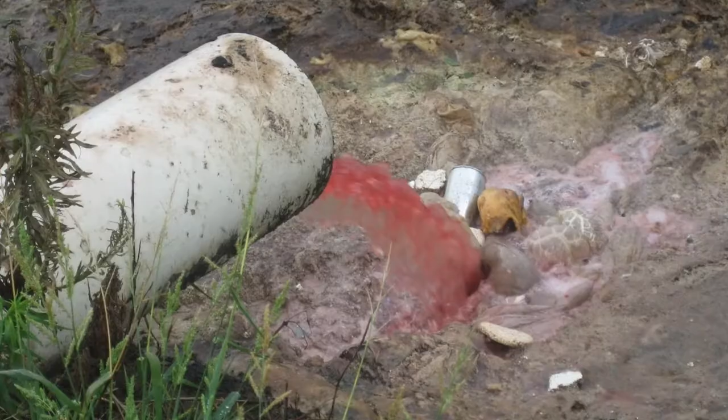Water is important to our economy and enjoyment, as well as to the environment. However, without clean water, each of these areas suffers. Without clean water, our survival would be in jeopardy. Clean water is required for drinking, bathing, and sanitary reclamation.

Clean water makes recreation possible. Clean water is necessary for safe farming and food production. Clean water is utilized for heating, cooling, and a myriad of other applications.

Water occurs naturally as part of the global ecology. It can be found in the sky, on the surface, and in the ground. Water can be a vapor, a liquid, or solid form. Water travels from one form to another, and along the way we can use, recycle, and return it.

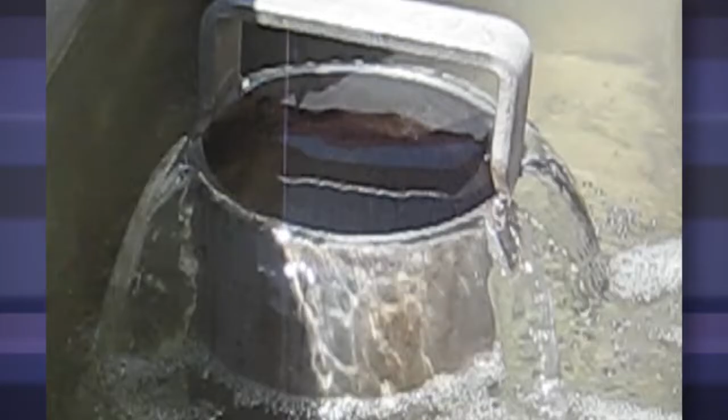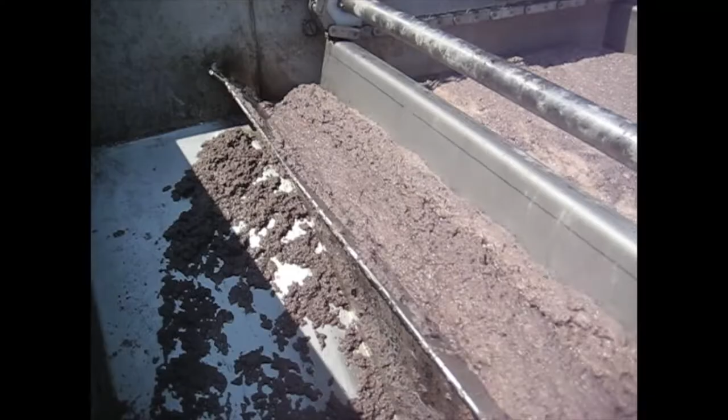Process Engineered Water Equipment is in the business of making water clean, usable, and available again. To this end, PEWE produces systems for both the many industrial and municipal markets. Our quality equipment speeds water reuse through the liquid-solid separation process by removing impurities efficiently. And by helping the process, PEWE is helping the world.

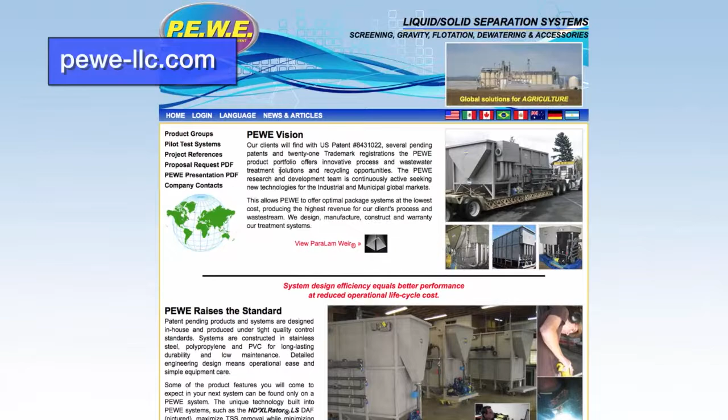Clients seeking water solutions find Process Engineered Water Equipment through our representative network, engineering firms, and marketing efforts. PEWE outreach efforts also include professional video presentations, scientific conferences, and published papers. Notable PEWE article links can be found on our website, as well as by internet search for PEWE presentations.

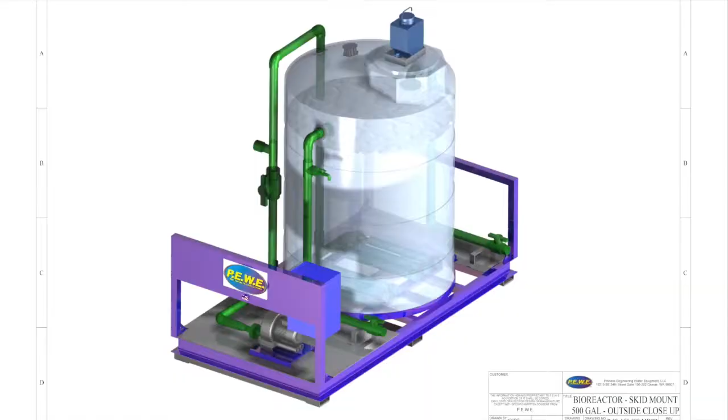PEWE begins with thoughtful design. Our engineers tackle a problem from multiple angles. When a system is developed, engineering draws it via CAD. Laboratory tests it, and then first-generation field analysis is performed. Once manufacturing improvements are final, the new system is ready to be introduced.

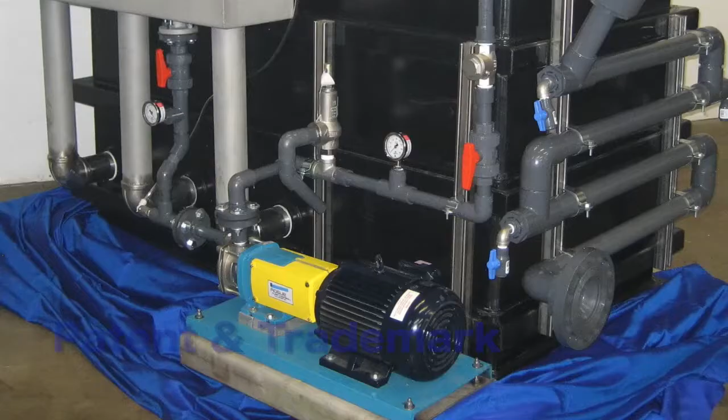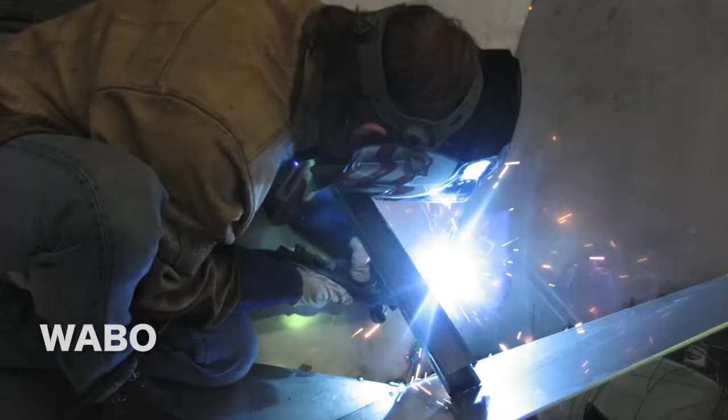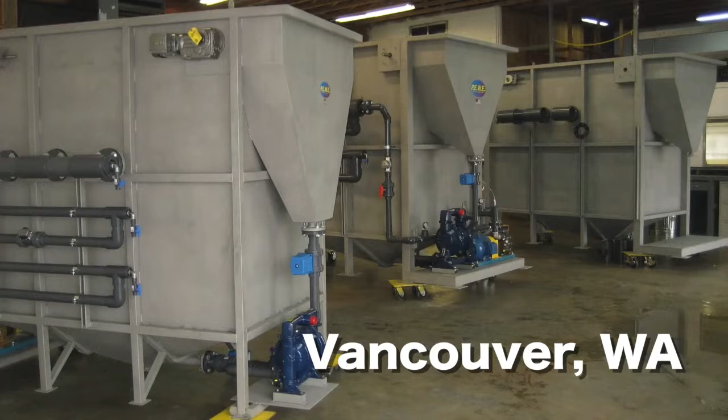PEWE has obtained patent and trademark registrations for our unique design solutions and continues to develop innovative solutions to solve pressing water issues. We manufacture our equipment in-house. This assures our clients of smooth production, craftsmanship, tight quality control, and prompt delivery. The engineering and fabrication facilities are located in Vancouver, Washington, on the west coast of the USA. From this plant, PEWE ships systems globally.

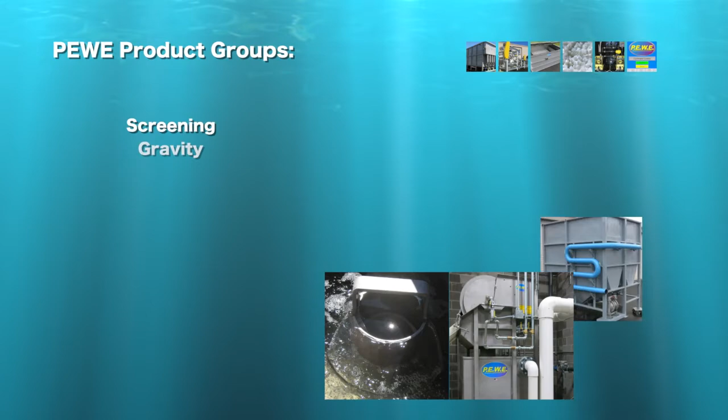PEWE product groups include liquid-solid separation equipment for screening, clarification via gravity and flotation, solids dewatering, biological reduction, and chemical accessories. Singularly or combined, PEWE control systems allow for economical and operational ease.

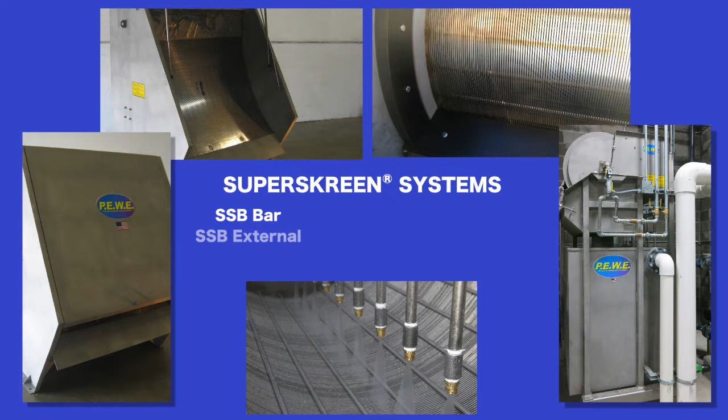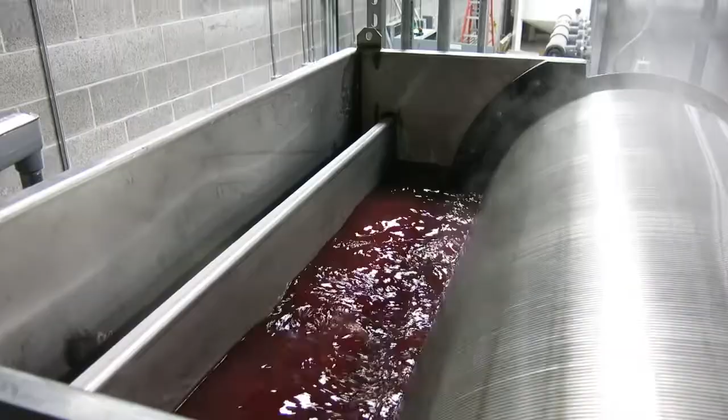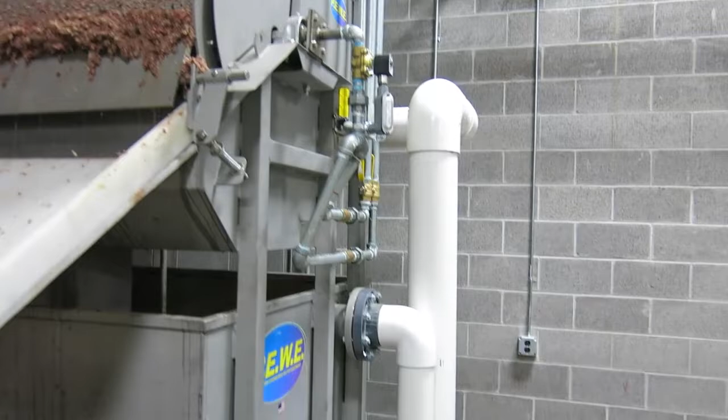PEWE offers a complete screening lineup with the SuperSkreen. Whatever the application is, one of our bar, externally fed, internally fed, parabolic side hill, channel, or thickener models is the answer. SuperSkreens are typically placed at the headworks of a wastewater treatment plant. They are used to remove large objects such as rags, plastic bottles, wood, food solids, and other debris from the waste stream before entering the treatment plant. SuperSkreens cover wide flow variances for both normal and stormwater conditions.

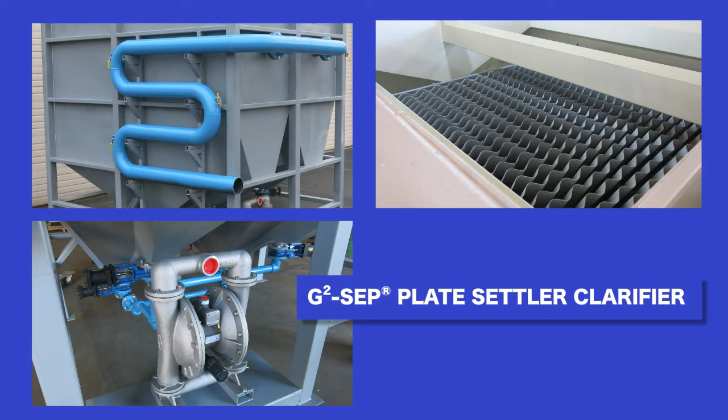Each PEWE G2-SEP plate settler maximizes settleable solids removal while minimizing chemistry usage. The chassis and vessel are constructed of AISI 304 stainless steel. With the true counterflow plate pack, the G2-SEP offers the smallest footprint available.

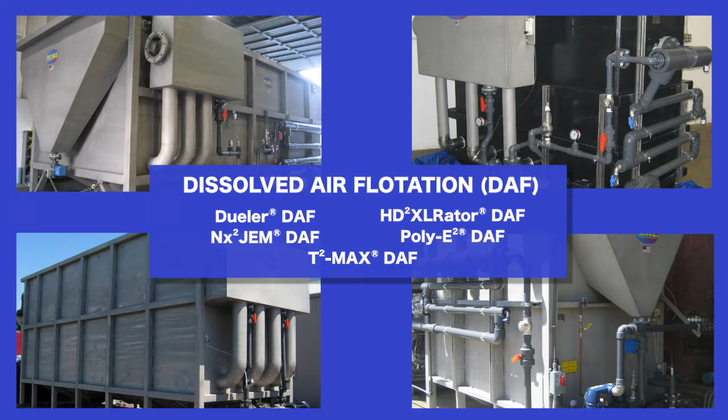The PEWE Premier line of dissolved air flotation, or DAF, systems cover the full range of solids removal possibilities. Flotation systems are available for very high solid sludge thickening, mixed settleable solids, as well as the more typical suspended solids encountered. All PEWE DAF systems feature integrated pipe flocculators, Roth pump regenerative turbine aeration, solids disposal pump, and safety recessed direct drive skimmer.

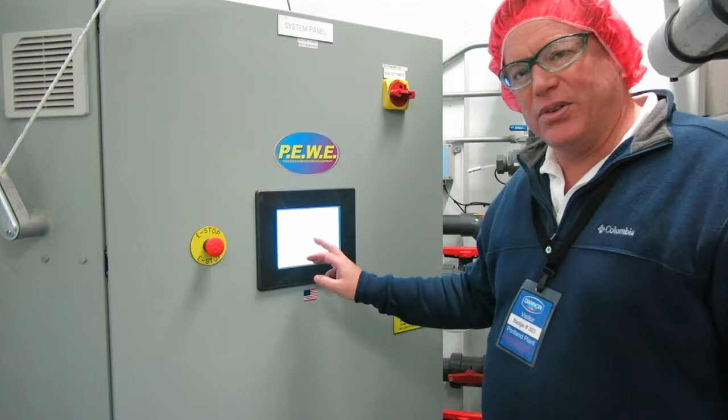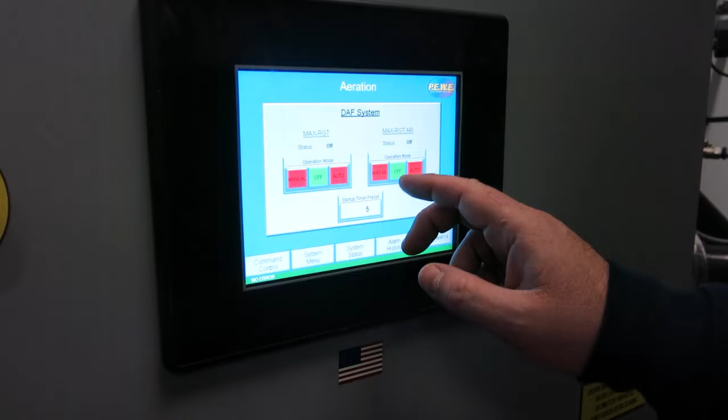Hi, good afternoon. This is Stuart Ward, and I'm going to be demonstrating how to turn the aeration system on this DAF system from PEWE. So the first thing we want to do is make sure the system is enabled. We're going to switch over to the system menu, click on the aeration, and we have manual and auto settings. For this demonstration I'm just going to simply hit manual.

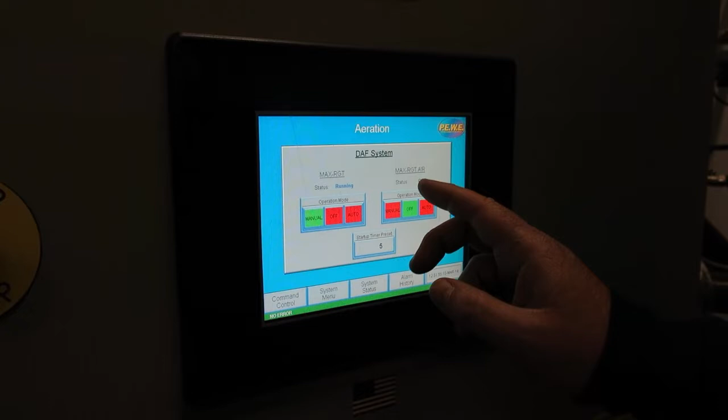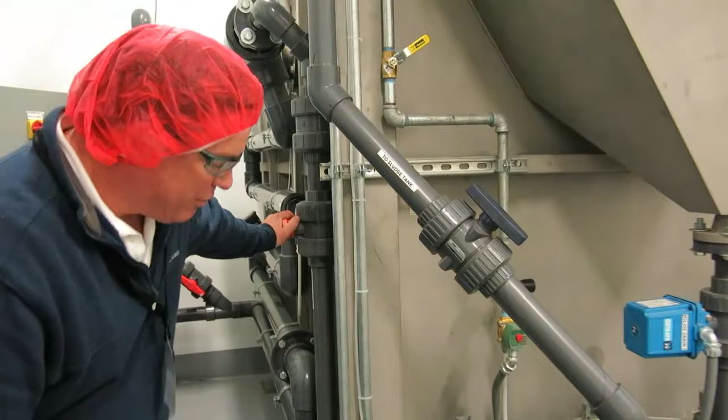So in this case we're going to turn on the MAX-RGT pump. It has a 5-second delay, which is adjustable by the operator. You hear the pump come on. Now we're going to turn on the air system. That is on and running. And we're going to come over here and adjust our throttle valve until we have 80 psi on the discharge.

Then we're going to make sure that we're sucking in just a little bit of a vacuum on the vacuum gauge, and we do that by setting our feed valve coming from the clear well into the head of the pump. And we can adjust the amount of air going into the system through the rotameter. Right now we have 43 cubic feet an hour going into the system.

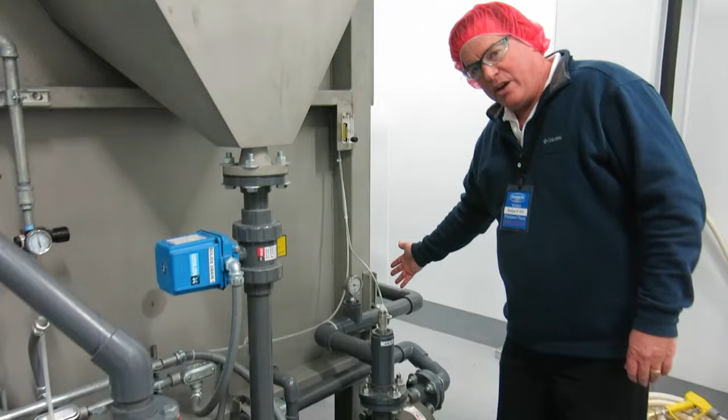So between controlling the air and water going into the pump, and maintaining a discharge pressure through this throttle valve, we can then inject aerated water into the system. And every time the system comes on, the DAF will get a 20 to 30 micron bubble, creating a great mat for floating our solids. Thank you very much.

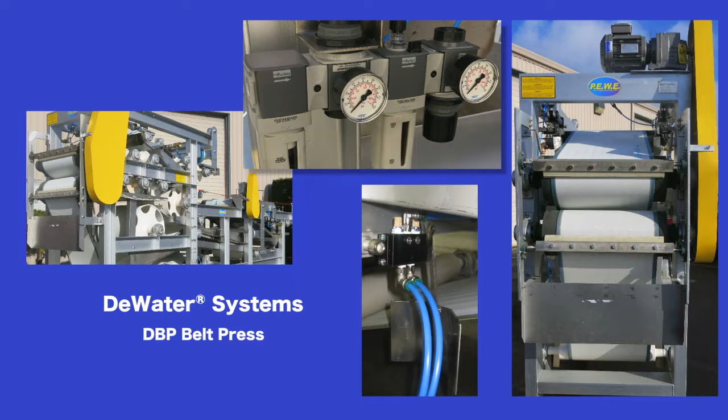PEWE dewatering systems are designed to maximize solids recovery while minimizing chemistry usage. Selection of the appropriate press system depends upon the sludge solids characteristics encountered.

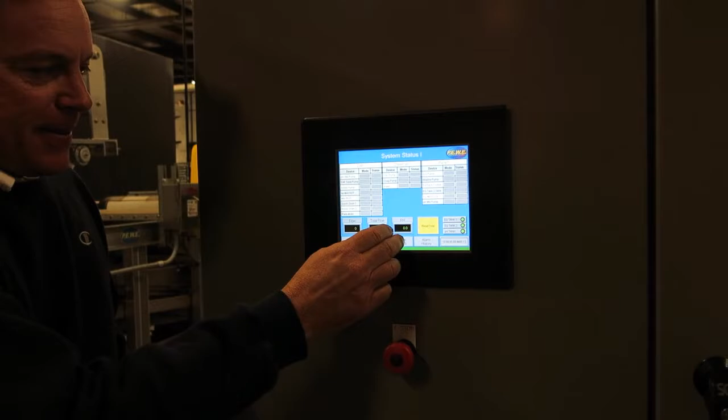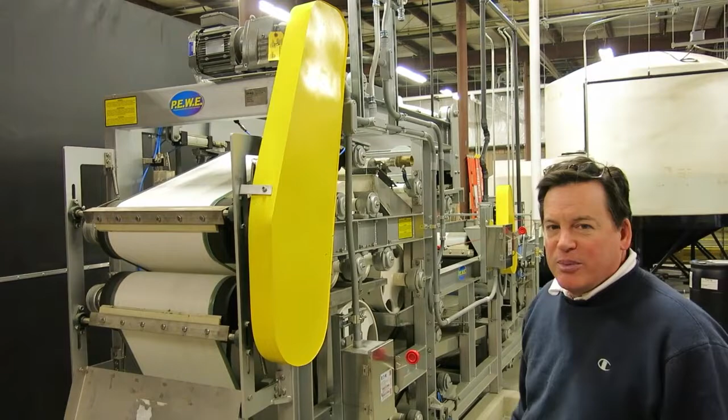Here we can see the system status. For the belt press, we're in manual, we're in operation, and all the operating parameters. We're just taking a quick peek at the press itself. It's now in operation, running at 30% on the VFD. Nice leisurely pace to dry the solids.

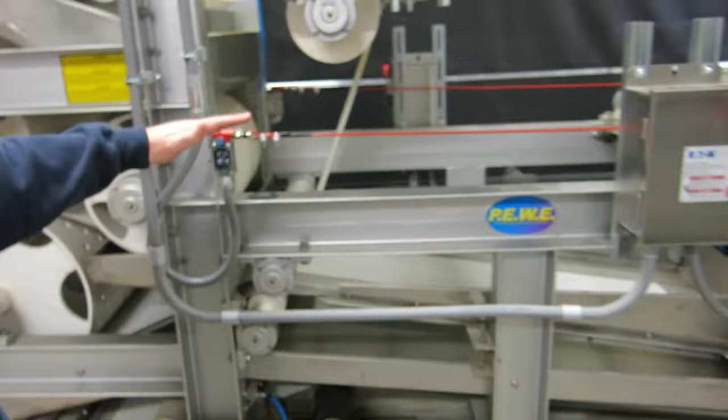The pre-dewatering belt is in the wash mode. The second and third belts will come next. The way the system operates is we first gravity dewater the solids as they hit the belt. They fall onto the main belts. They're squeezed in a dual action pincher motion, go through the press itself, and then fall off the press at the doctor blades.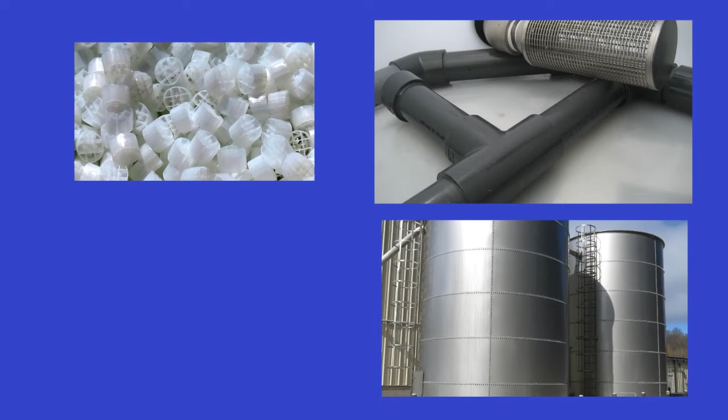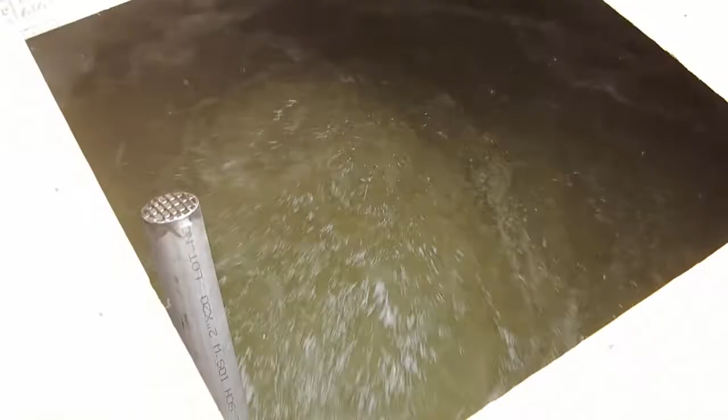The PEWE Moving Bed Bioreactor, or MBBR, is a standalone wastewater treatment system used for the reduction of soluble organics and nutrients. The key to this system is the ASO biocarrier media, which provides a suitable home for biological colonies of bacteria and protozoa to grow and flourish. The PEWE MBBR system plays a key role in both industrial and municipal wastewater treatment.

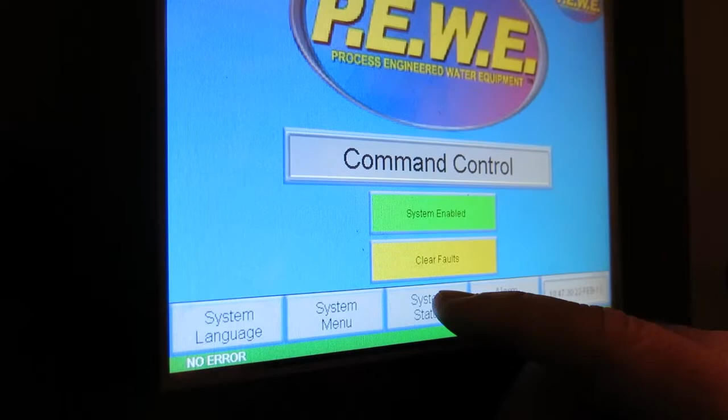The system has been enabled and it's running right now. We have no faults, no errors showing. And so the typical screen that's going to be showing is the system status. And you can see here that we have the blowers running in auto mode. Blower 2 is on standby.

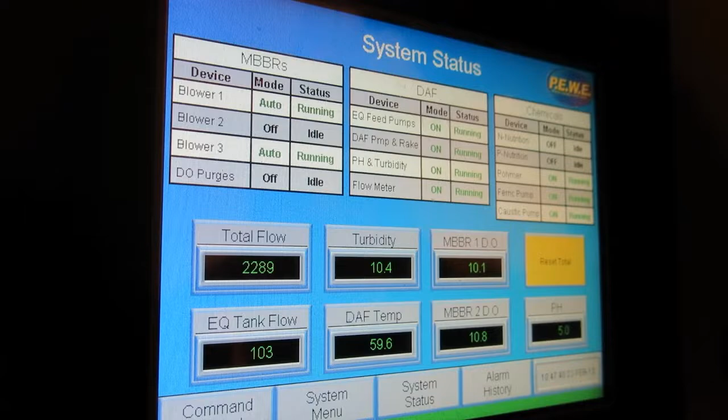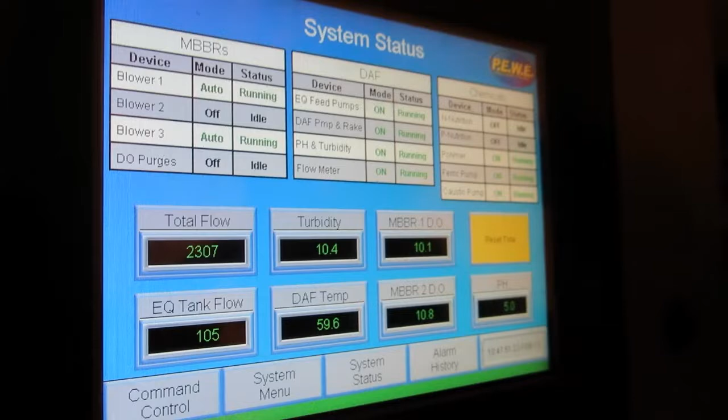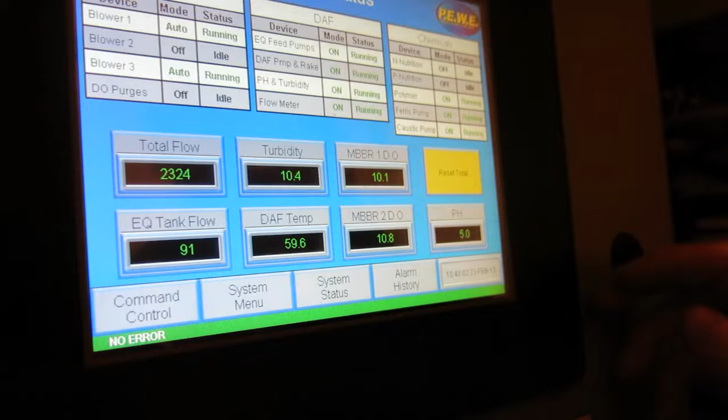The DO purge cycle is off at the moment, but all the rest of the pre-treatment equipment and chemical feeds are either idle or running depending upon need. On this screen we have the total flow running through the system, the turbidity, the MBBR DO, the pH, all the different parameters that are important.

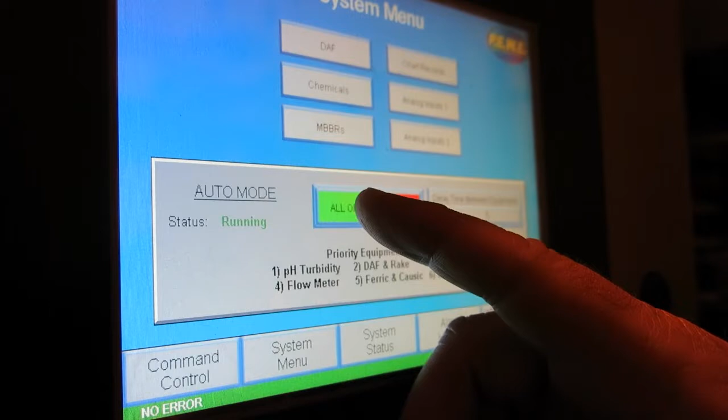So on this screen is how you would navigate to change things. In particular for this setup, we have an auto mode which automatically starts all of the different pre-treatment systems ahead of the MBBR. And we have them set on a 5-second delay in between each one of the different pieces of equipment, whether it's the feed pumps, the DAF rake, turbidity meters, flow meters.

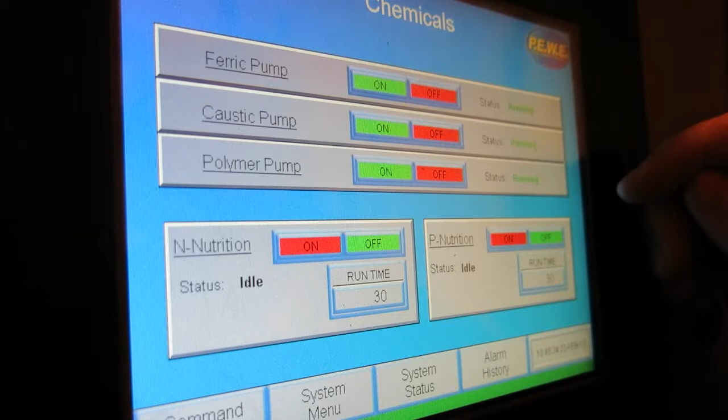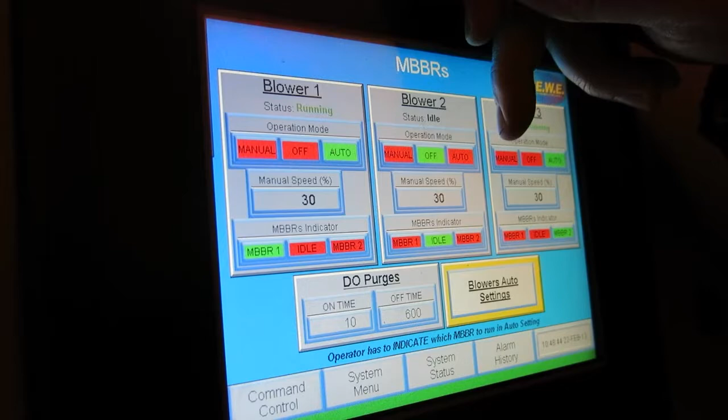Additionally, the chemical pumps are also on that. The nutrition pumps run individually because they're used only sporadically. The MBBRs themselves can be run in auto mode or in manual mode, and we simply need to touch the button. We can change the speed for manual mode to 20.

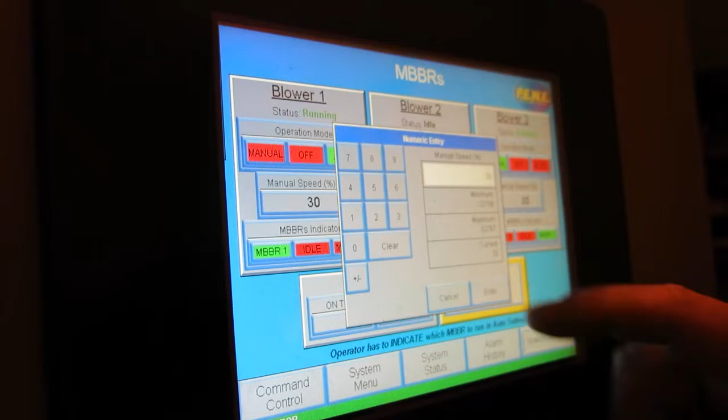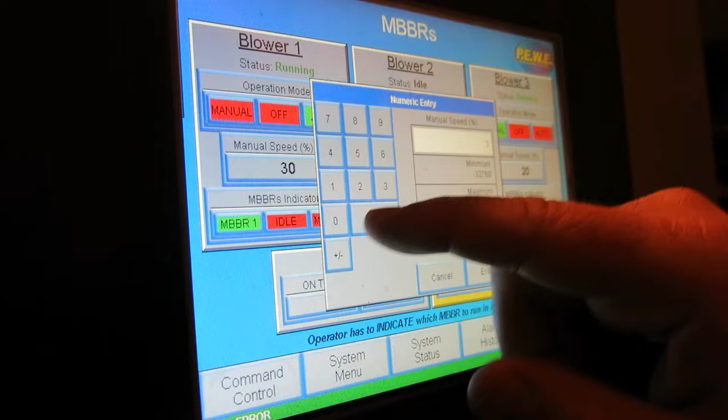We also have a feature designed into the system. If someone tries to run the system too slow, it will automatically revert to 20 on the speed and can be corrected if need be. You can hear the blower speed up and slow down.

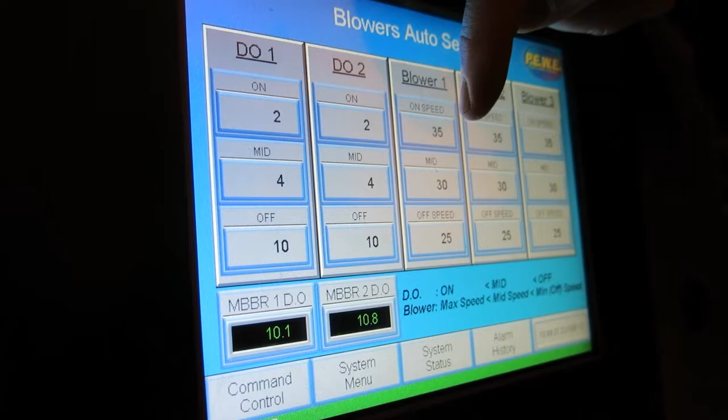Additionally, we have a system in place so that we're always making sure we're reading the correct probe, called the indicator probe, for the DO measurements, because in auto, what's happening is the blowers have operator selected speeds for the different DO levels. So for tank 1, these are the levels, tank 2, these are the levels.

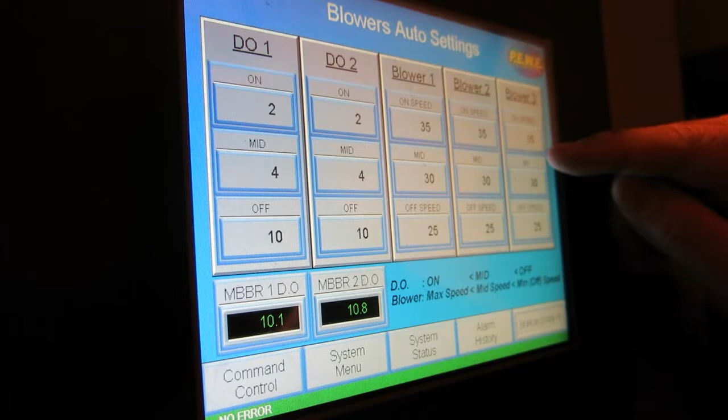So we're never going to fall below 2. We're going to speed those blowers up. As we approach 4, we're going to slow down to 30, and if we get above 10 parts per million, we're going to slow down to 25, our minimum flow rate. So that's pretty much exactly how the system works.

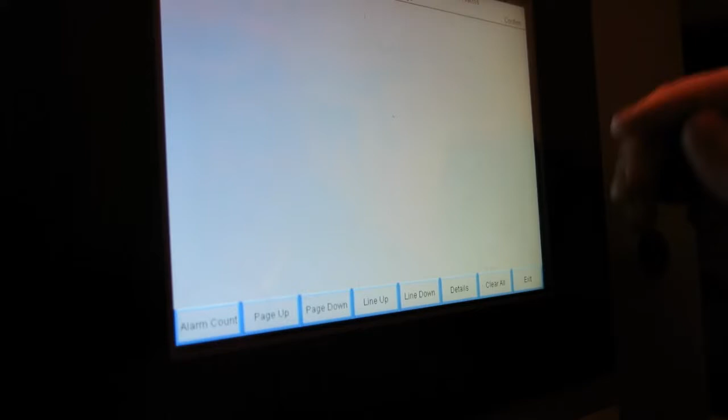If in case there is an error or an alarm issue, the alarm light will turn red, the alarm screen will come back up, we can see the details, we can clear them, and then exit the screen back. So overall, this is typically where you're going to be sitting for this system. Very straightforward and easy to use system.

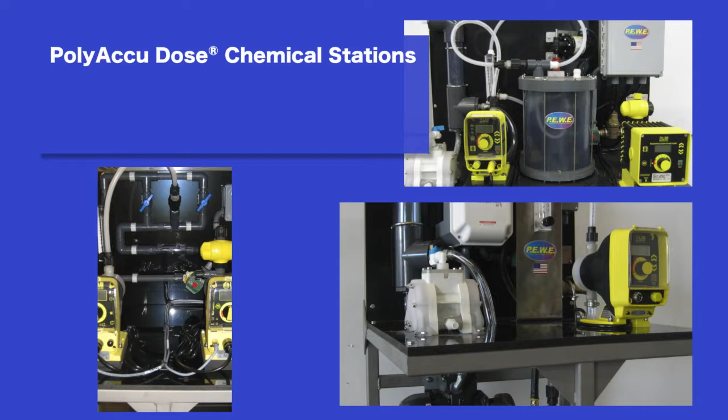Thank you very much. The PEWE PolyAccu Dose systems are designed to efficiently make down liquid chemical for water and wastewater treatment. Our systems consistently apply the correct mixing energy and time in the proper amount of water.

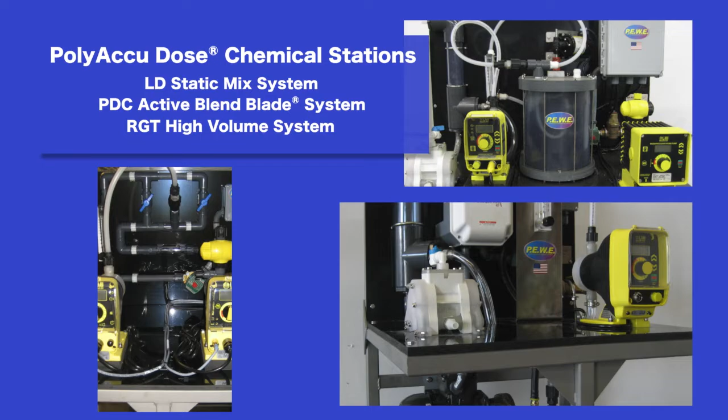This is Stuart, and I'm going to introduce you to the PolyAccu Dose system from PEWE. This is the model LD10D, and this particular model is for smaller systems. It's using the new LMI latest version of their pumps. They're quite easy to operate and easy to prime, which we just did.

So the way this system works is it's based on flow going through the system. We take a 4 to 20 milliamp signal and we'll turn on and feed proportional to what's going to the DAF, so that we're always maintaining good chemistry. So in this particular case, we have the pumps set. They're on an external feed from the command control panel.

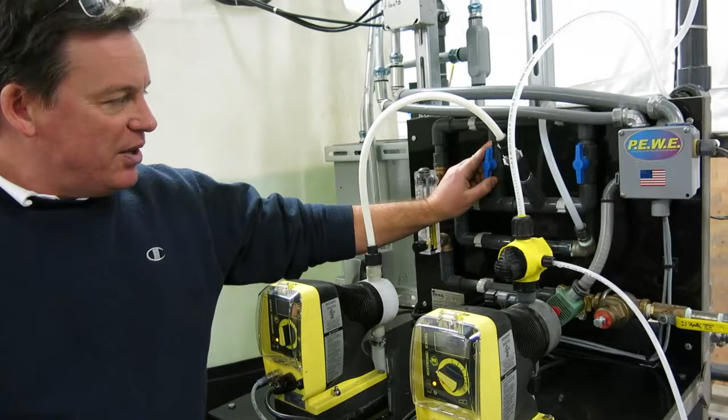The solenoid pops open. We can regulate our flow and dilution of our polymer through this rotameter right here, and I'll set it at about 3/4 flow, and we can adjust the amount of dilution that's going through the system as it's operating. It's as simple as that.

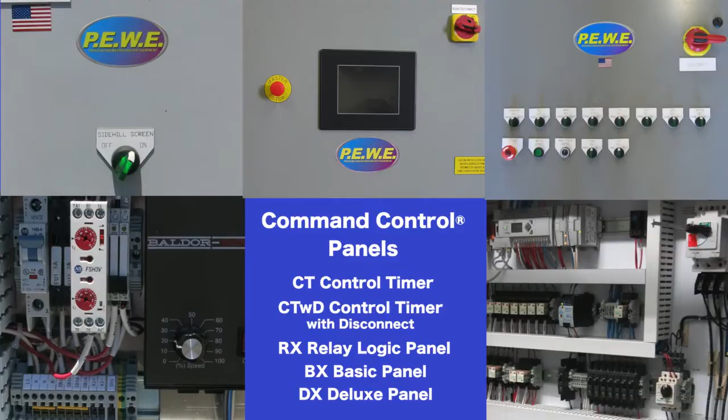Thank you very much. PEWE Command Control automated systems ensure safe and efficient process and wastewater operations. Personnel will find the hand selector and multilingual touchscreen interface easy to navigate while providing a comprehensive system overview.

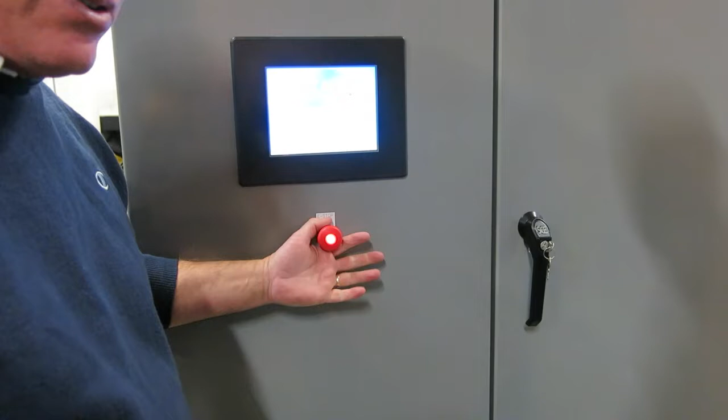Good morning. Here we are introducing the new operator Lane at Hobart Brothers to their brand new wastewater treatment plant. In this case, we're just going to step them through the very simple controls for the unit. So starting right here, Lane, at the front, we've hit the E-stop to start from scratch. The first thing we do is pull out the E-stop, enable the system, clear the E-stop fault, and we're ready to turn the whole unit on.

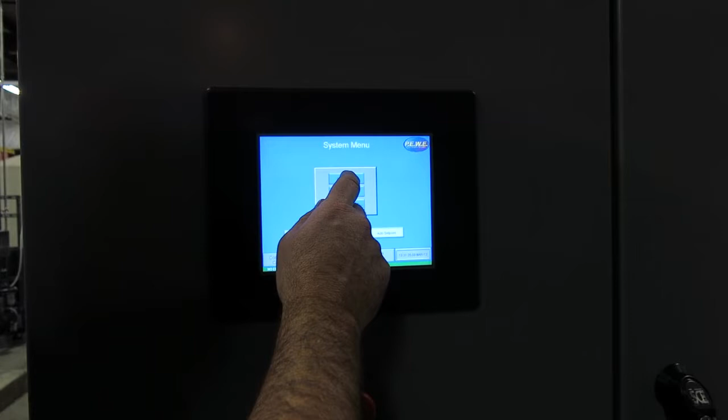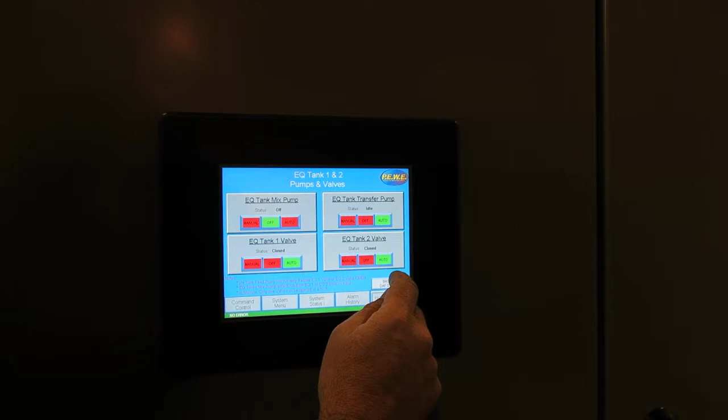We go straight to the main screen, start with the front of your system, go to the lift pumps out in the pits, turn on the acid and alkaline lift sumps, go back to the DAF screen, go to the EQ tanks, set them to auto. They're operated by floats in the system itself. Go down to the pH tank, set that to auto, the DAF feed. You can hear them kick on because we have water in those tanks.

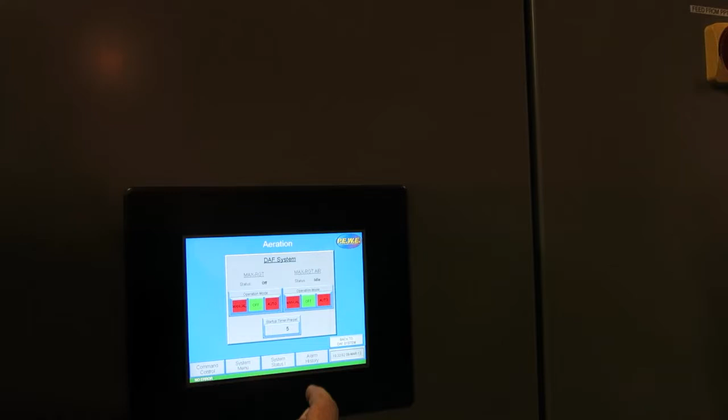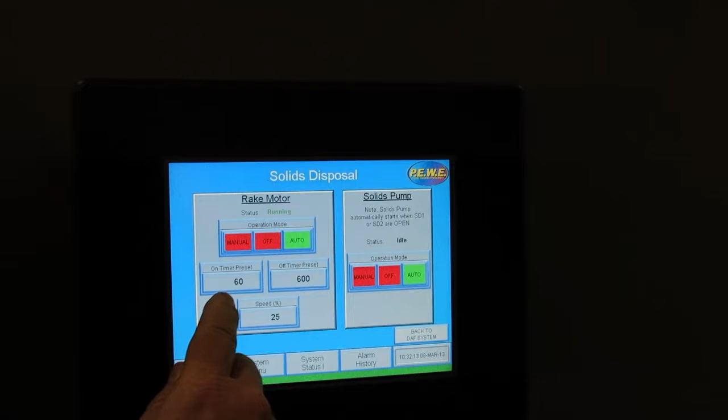We go up to the DAF aeration system. It senses flow, set it to auto. We have it on a 5-second delay. Turn on the solids scraping system to auto. It's set to run at 1-minute intervals every 10 minutes. And it's set for 25% speed on the VFD. You can select all these speeds.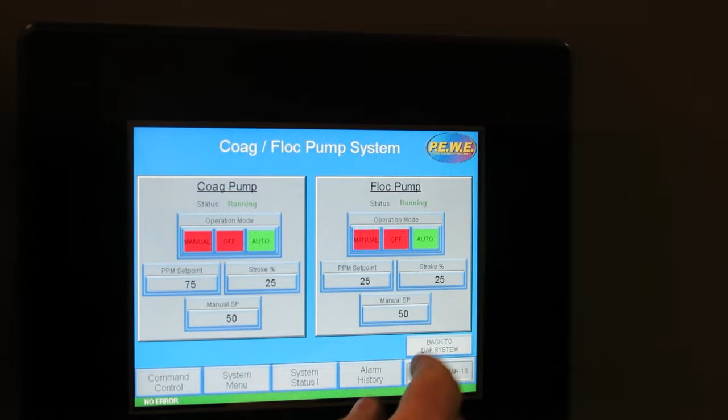Go back, and now we'll turn on the coag feed system. Again, those are predetermined rates by the chemical representative here today, and we set those at these various rates. We can go back to this. Now we're going to go to the MMF. We're feeding this water onto a multimedia filter system for final polishing.

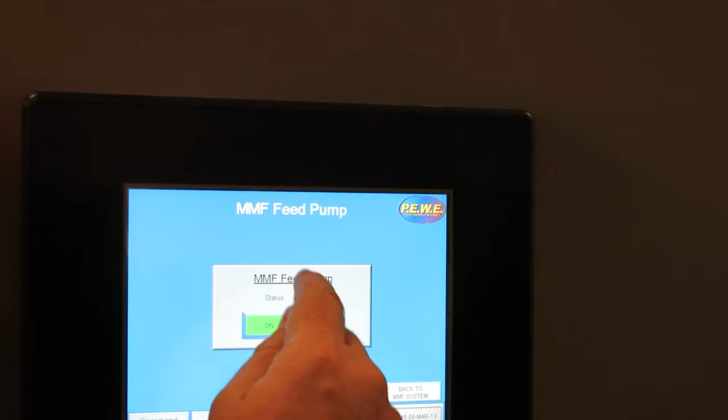Turn the feed pump to on, turn the back flush to auto, turn the vessels to auto, and they will automatically cycle through and run themselves. Thank you very much.

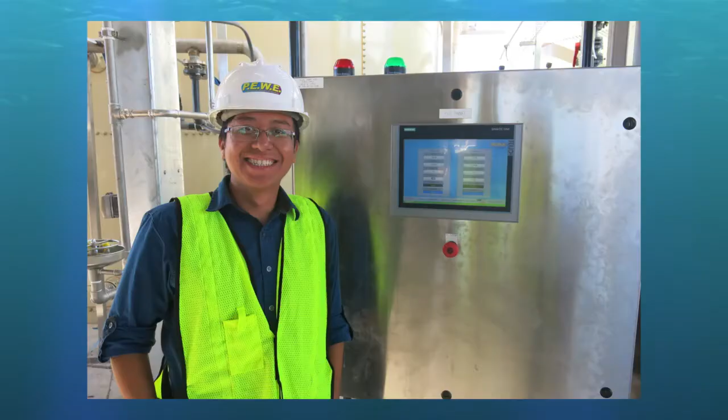Throughout a project, clients experience PEWE's commitment to their goals by our knowledgeable representatives and experienced engineering staff. PEWE Command Control is friendly, multilingual, and user-adjustable with electronic record-keeping options. Custom controls go hand in hand with continuing technical services support. The PEWE team will get a water equipment project on track, operationally started, and help keep it maintained.

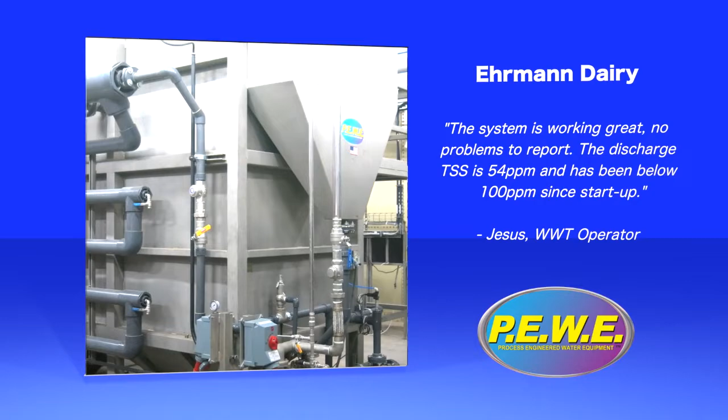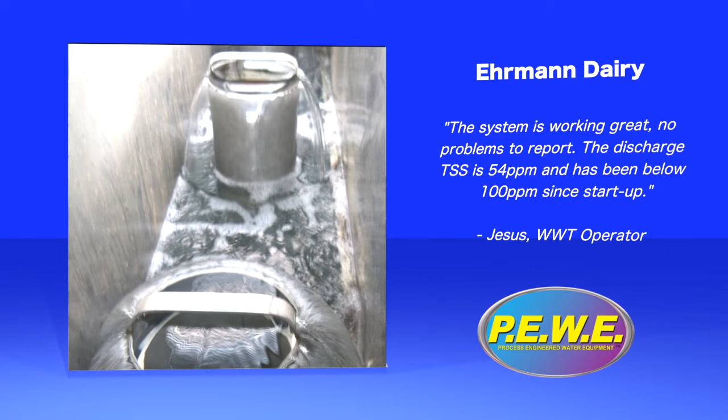The new Ehrmann yogurt facility is in full production and supported 24 hours a day by the wastewater plant. The WWT system with its HD Accelerator LS DAF, followed by a DeWater Systems belt filter press, consistently produces clean water and is well below discharge requirements. The installed system has plenty of room for the expected growth.

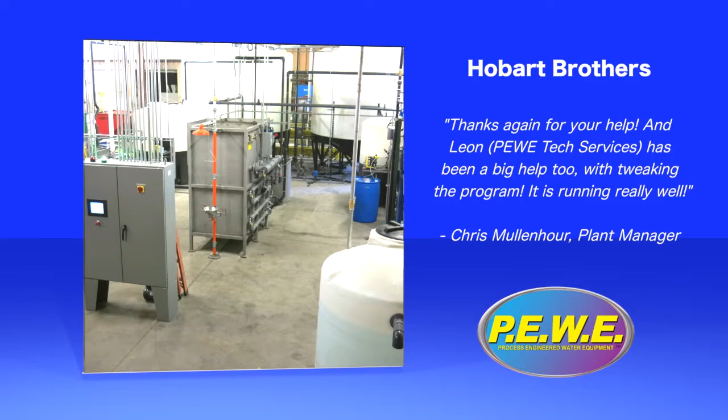PEWE provided Hobart Brothers with a completely new wastewater treatment process. The system entailed dual lift stations for acid and alkaline streams with EQ balance tanks, pH control, flow proportional PEWE PolyAcuDose chemical feed, a stainless steel PEWE HD Accelerator DAF, and a DeWater Systems belt filter press. System automation was key to the operation with a Command Control DX panel.

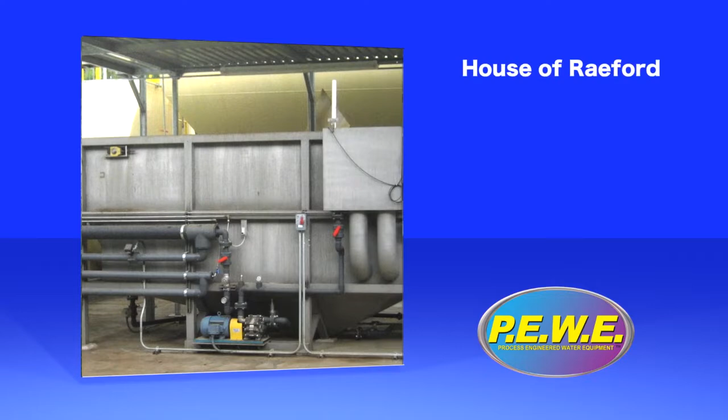The House of Raeford ramped up production and overran their wastewater ponds. Plant management selected PEWE to provide a water reuse equipment package. The complete system package sent included a PEWE T-Max thickener DAF and a dual-purpose PolyAcuDose unit. House of Raeford Hemingway personnel are completely satisfied with 100 gallons per minute of filtered reuse water now being brought back to the plant.

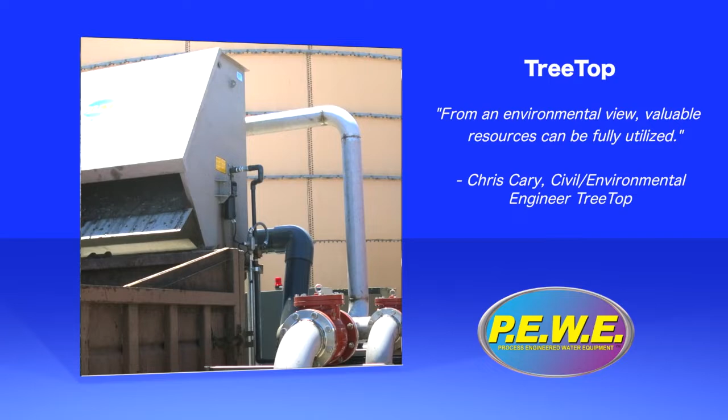The Tree Top Incorporated Oxnard facility creates ingredients for the food manufacturing industry. Upon startup, the new parabolic side hill screen system gave the desired solids capture results. The new stainless steel PEWE SuperSkreen wedge wire screen was easy to operate, and the solids went straight into the dumpster.

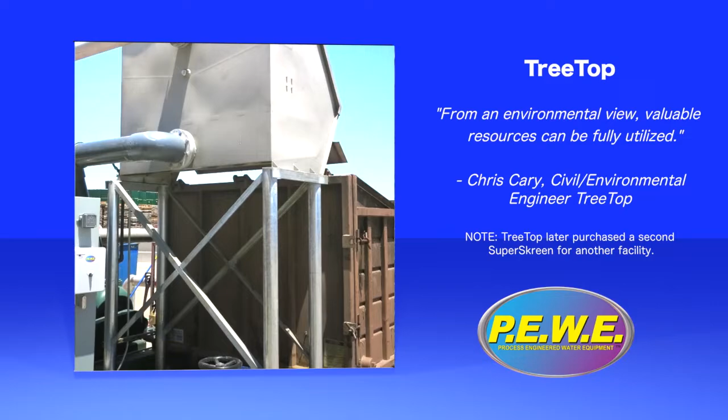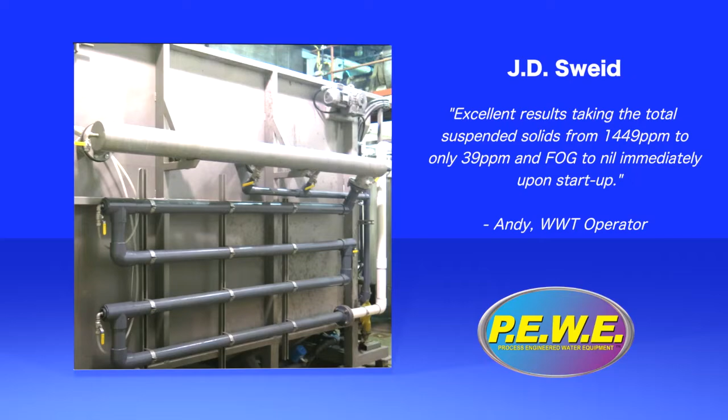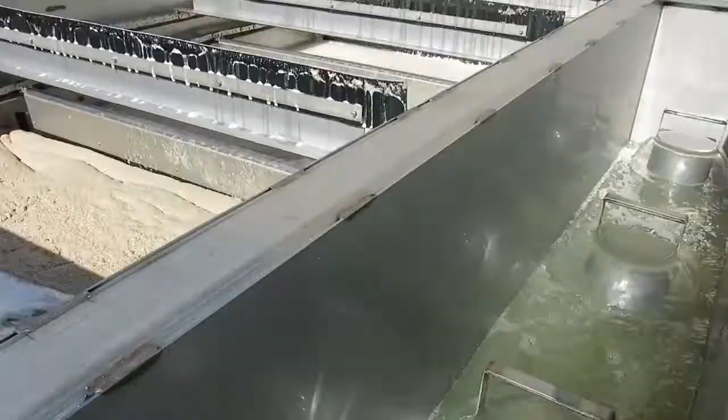J.D. Sweid Foods manufactures a wide variety of meat products at its British Columbia, Canada facility. The plant had a well-worn dissolved air flotation unit which needed replacement as part of an overall discharge improvement program. A PEWE HD Accelerator DAF was selected. Tech Services provided install startup support, or ISS, on-site until the system was up and running. As can be seen in the video, plant discharge is consistently below 35 ppm TSS with very high and dry solids capture.

As the last client project demonstrated, and seen again here, the importance of clean water is clear. The Process Engineered Water Equipment product portfolio offers a complete range of systems answering the need, and the PEWE staff can help choose which solution is best for your application.